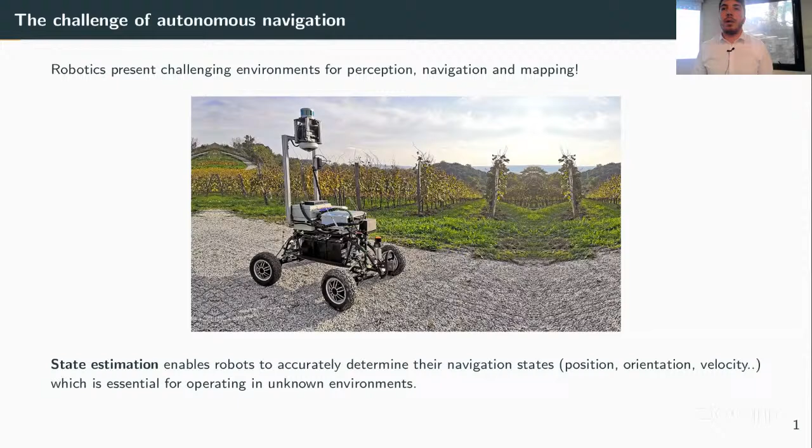So why visual inertial navigation? It basically comprises two types of sensors. The first sensor is a camera. It's a lightweight, cheap, and easily accessible sensor, and it provides us with rich visual information on the environment.

And then we have an IMU, which is an inertial measurement unit, which provides us with measurements on the motion of the robot itself, and that's angular velocity and acceleration of the vehicle. So these two sensors are complementary, and if we combine the measurements, that will lead to low cost and highly accurate navigation systems.

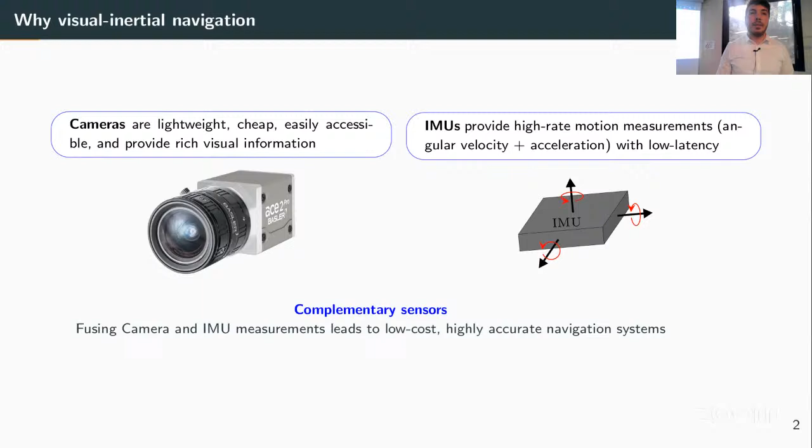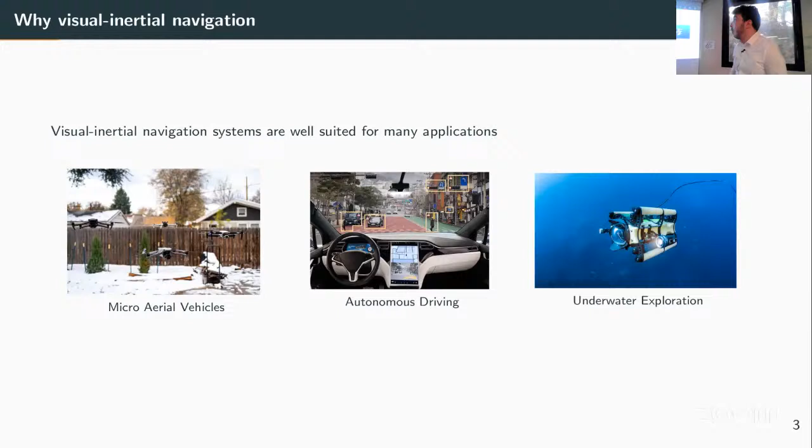So visual inertial navigation is well suited to many applications, like micro aerial vehicles, autonomous driving, underwater exploration and different underwater applications. Also, it's present in wearables and health tracking devices, and in augmented reality and virtual reality experiences more recently.

So why geometric observers? What we mean by an observer or a filter is an algorithm that is designed to estimate the states of a system from incomplete or noisy measurements. In general, we have a dynamical system, and we want to design an observer, which is this algorithm that will estimate the state of the system. In order to do that, we have to design the estimate such that the error between the estimate and the state goes to zero or converges to something that we want.

Luckily, for problems in robotics and navigation in general, the states actually live in a specific type of manifolds, which we call Lie groups. What we mean by a Lie group is that it's a manifold that also has additional structure. For example, we can multiply elements in this group in order to generate new elements, and we can also invert elements. If we multiply an element by its inverse, we get the identity element, which is sort of the central element in the group.

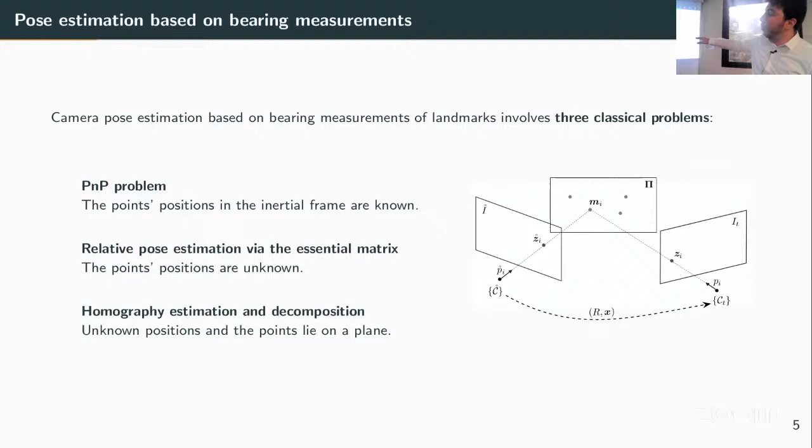Now, when the landmarks happen to lie on a planar surface, then we talk about homography. The way this problem is solved is we estimate this homography matrix, and then we decompose it to extract the relative pose between the two frames. A particular focus of this thesis will mainly be on the last part, which is dealing with homographies for this type of problem. Okay.

So there's a set of contributions that I want to discuss in this work. The first two contributions are essentially related to pose estimation. We want to estimate the pose of a robot, and we want to do it using velocity measurements. Then we will extend this to inertial measurements. And we want to use homographies as our visual measurement to do this.

And for the rest of the contributions, the perspective will change. We will not be actually doing pose estimation, but we will be estimating this homography matrix itself. So we will basically design observers to estimate this matrix, and I will show you later why it's important to also work with homographies themselves. And in the last contribution, I will also talk about something we call polar symmetry, which can also be applied to estimate the pose of a robot for specific types of problems.

Okay, so now I'll start with what we call Riccati observers. As I said, we have some moving frame here, which is C(t). This frame is attached to the camera, and we have some reference frame C0, and we have a relative position and orientation denoted by R and X as the relative pose between the two frames. And we also have a distance and a normal vector to this plane expressed in both frames.

And so if we have coordinates of the points P_i0 and P_i, which are expressed either in the moving frame or in the reference frame, these coordinates can be projected from one frame to the other using the homography matrix. And this matrix is this H, which is a 3x3 matrix that encodes the relative pose between them and the structure of the planar scene, so its direction and distance.

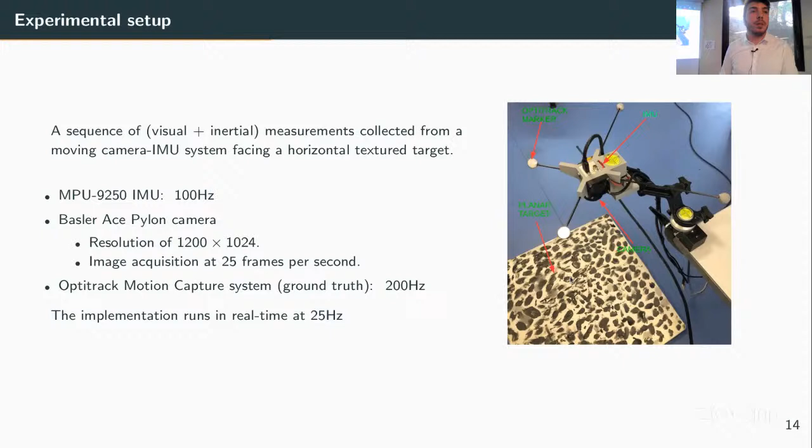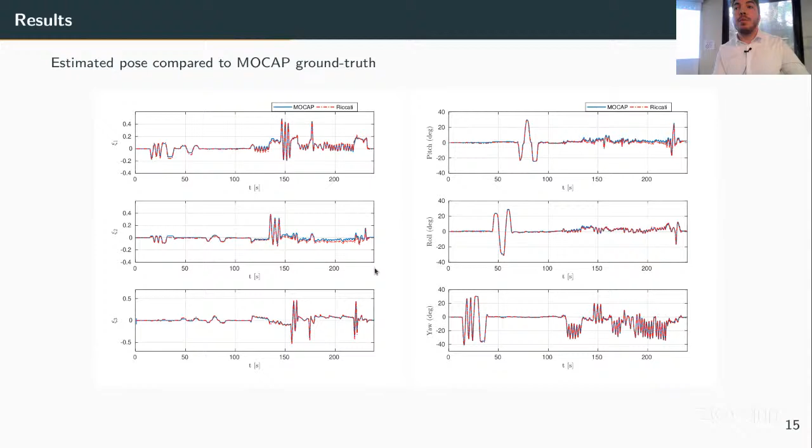So we do this, and we can see here, in blue, we have the motion capture ground truth, and in red, we have our pose estimate. So these are components for the position vector, and these are the Euler angles for the orientation. So we can see that we get some small deviations over here. And this is because the moment we start actually moving in translational motion, the assumption on the constant velocity is no longer valid. So it still converges quite consistently, but we can see that there is some deviation between them.

So a solution to this is instead of using velocity measurements, we can actually use inertial measurements. So we use the accelerometer that we have in the IMU. But this is not very easy to do. So we have our system as previously. Now we have to include the velocity as a state.

And we can also define the error using a group. In this case, it's not the special Euclidean group, it's what we call the extended special Euclidean group. So now we can also add the velocity into the group, and we can define our errors. And in order to design the innovations, we apply exactly the same principle as before. We linearize the system, then apply the Riccati framework.

So we also now have to find uniform observability conditions. So we're also going to require the consistent set condition for the states to converge. And we use uniformly consistent, which is a stronger property that I will not really detail. And we also need a persistently exciting condition that needs to be satisfied on the variation of the velocity. So this sort of says that the velocity cannot be constant. So there has to be some acceleration in order for this to be satisfied. And if this is satisfied, then we can actually estimate the depth, and we can also estimate the gravity. And so we have the local stability of the filter.

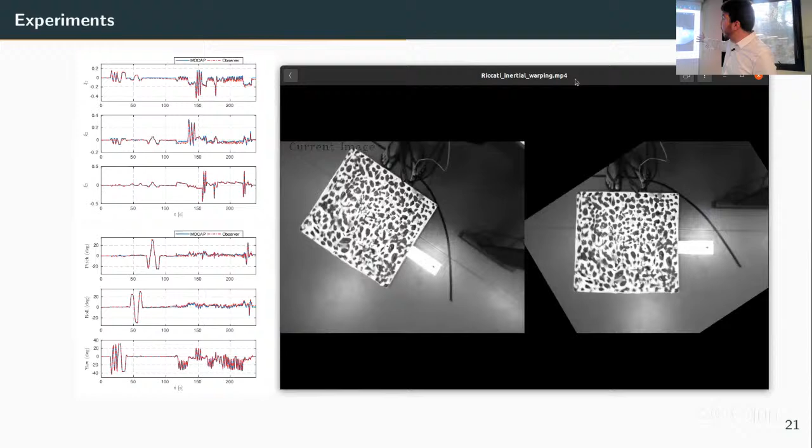So just to show you, these are the results that we got for this one. So just to show you a video. So what we do in this case is we actually do what we call warping. So now I have all the states in order to reconstruct my homography estimate. And I can now evaluate my estimates using this homography. So the homography can be used to warp back all the coordinates into the reference image. So it's as if we have a constant image here, and it's the environment that is sort of moving because we're using this homography matrix.

And at first we have this motion over here, so we have this motion on the yaw. And then we switch to other types of motion. And as these states are actually converging to the ground truth, I can reconstruct a homography matrix and then use that matrix to do what we call warping. So the idea is simply projecting back images from one frame to the reference frame, and it feels like the reference image is not changing at all. It's just that the environment is sort of moving.

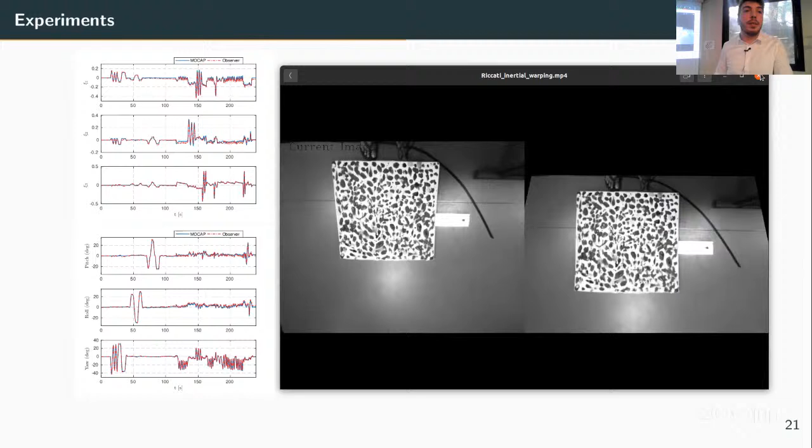So we'll not show the entire sequence, but this is one of the many applications of homographies. This is what we call image stabilization, where we want to stabilize an image, and we can actually use these in control problems and similar things. Okay.

So for now, these are the contributions that I discussed for pose estimation by designing Riccati observers. I will now switch to a different perspective in this thesis, and I will not be talking about estimating the pose itself, but about estimating the homography matrix. So the first contribution in this sense is what we call a dense observer. What I mean by an observer that estimates the homography using dense measurements is that instead of using features in the image, we can actually use the entire image as a measurement. So how do we actually design observers for the homography?

So one idea is that the homography itself is defined up to a scale. So I can always inject some scale gamma over there, and this will generate always the same homography mapping. So I can choose this gamma in a way that will constrain the determinant of H to be equal to 1. And by doing so, I can ensure that this H matrix is in the special linear group, SL3. So you see we're working with a lot of Lie groups. This is one of the popular groups that we can work with.

Now that we are working with a Lie group, we can do a classical observer design on a Lie group. So this group element H has kinematics on the group. So it has these kinematics, H dot is equal to HU. And this U here is what we call a group velocity matrix. And it lives in the Lie algebra of the group, SL3. So this is basically a traceless matrix. So if this matrix is traceless, then this H will always remain in the group.

So what if we don't want to work with features? What if we want to work with the entire pixel information in the image? So one idea is instead of defining the action on the features themselves, you can actually define it on the intensities of the image. So the action of SL3 that I just showed you over here, this one, can actually be used to induce an action on their intensities.

So instead of just mapping the feature points themselves from one image to another, I'm actually now going to map the intensity of the pixel, so the value of the pixel itself, into another image. And we define this new group action here, which is defined as a composition of the image function itself with the other action on the feature coordinates. Now that we have an appropriate action, we can use it to do the design that I just showed you.

So the way it works is I can define an error image. So I have my image over here, which is my image I, and this image is related to my reference image using H. So I can have an H hat inverse, which will take me to an error image, which I want to converge to the reference image. So if this H hat converges to H, these images will be identical. And now what I have to do, I have to use the difference between these two images in order to design my observer. So I can define a cost function.

So this cost is given by this. So it's simply the norm of the difference between the two image maps. And we have this cost. The problem is, are we sure that this cost is non-degenerate? Meaning that when this E here is equal to the identity, is this really a global minimum for this cost?

So we actually derive a condition for that. So if this condition is satisfied, which means that the Hessian of this cost is non-degenerate, then we know that the identity is a global minimum. So we have a proof of this.

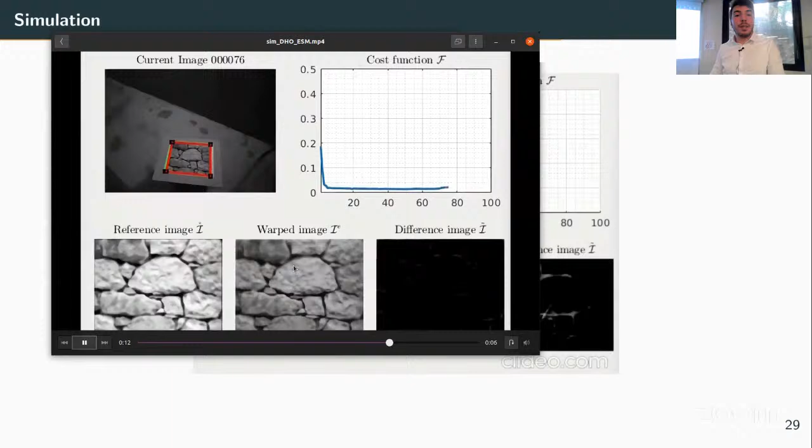And we can see here in red that as it starts evolving, the cost is actually decreasing, and we can see that the warping is actually good, which means that the estimate is converging towards the true homography. Of course, this is not perfect because the pixel coordinates are not exactly perfect. So we can see there's some vibration in the warped image that is slightly moving, but it's still converging towards my image. Okay.

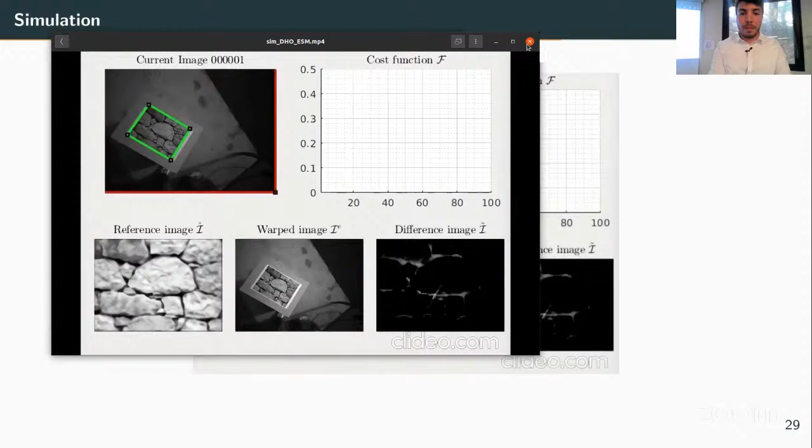So far, this was the contribution for the homography estimation problem. Before, they used feature coordinates directly to estimate the homography; the contribution was we can actually use pixel intensities. However, another issue is we still have to make these motion assumptions to estimate the homographies. So how can we avoid doing that? I will present to you something we call the augmented homography estimation. But before doing that, I have to go into a little bit of theory into what we call equivariant filters to explain what it is.

So what if the state of our system is not on a Lie group, but is on what we call a homogeneous space? A homogeneous space is basically a space on which we can find a symmetry. A symmetry is a group and a group action such that this group action acts transitively on the space. To give you an example, the sphere S2, which is the space of all direction vectors, is a homogeneous space of SO3, meaning that if I have some direction vector, I can rotate it anywhere using a rotation, and I can go to any other direction vector on the sphere.

And so we talk on this side about what we call equivariance. We say that the system is equivariant if we can also find an action on the input space, not really on the state space, which is this psi action, such that this condition here is satisfied. In general, what we mean by equivariance is that if I have some point in the manifold and I transform it into another point, the dynamics will also be translated, but the input will change. So there's also an equivalent transformation on the input space that matches the action on the state itself.

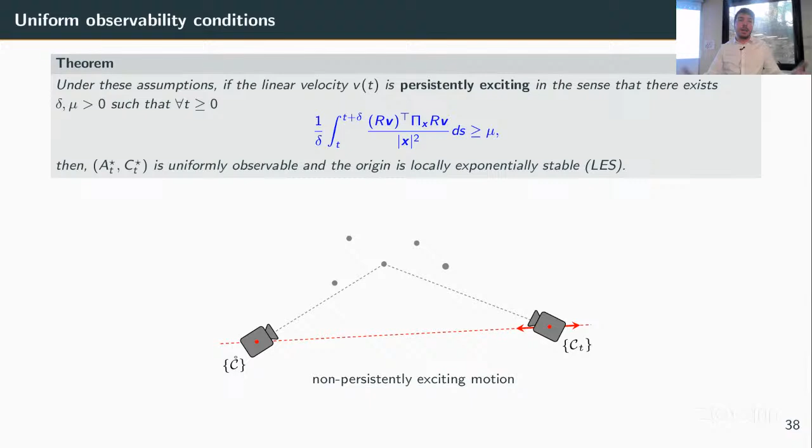However, what about the magnitude? For the magnitude, we actually have a uniform observability condition, and it's the following persistently exciting condition. If this condition on the velocity is satisfied, then the scale component is also uniformly observable, and so the entire state is locally exponentially stable. What this condition says is that the only motion that is not allowed is the motion on the axis relating the two origins of the frames. So if the camera moves like this, the magnitude is not observable. But if it moves in any other direction, it will be observable, and I can estimate it.

Okay, so I finished with the contributions of this work. Just to summarize: we designed Riccati observers to estimate the pose of a camera using homographies as implicit measurements, so we did not have to estimate these homographies but used them implicitly as measurements. We then proposed an observer that estimates homographies using dense measurements. Another contribution was defining the augmented homography problem to design equivariant filters, using velocity measurements or even inertial measurements. And the last contribution is applying the polar symmetry group to estimate the pose by decoupling the position components into direction and scale.

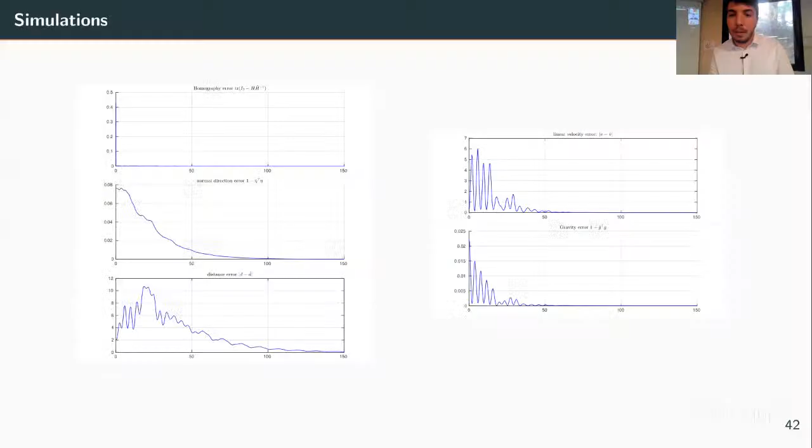So thank you, Tarek. I need to. Is my mic on? Yes. I don't see. What is the Zoom? Can you hear me? Yes, we can hear you. My mic is not on. Okay, so can you hear me? Everybody can hear me? Yes, okay.

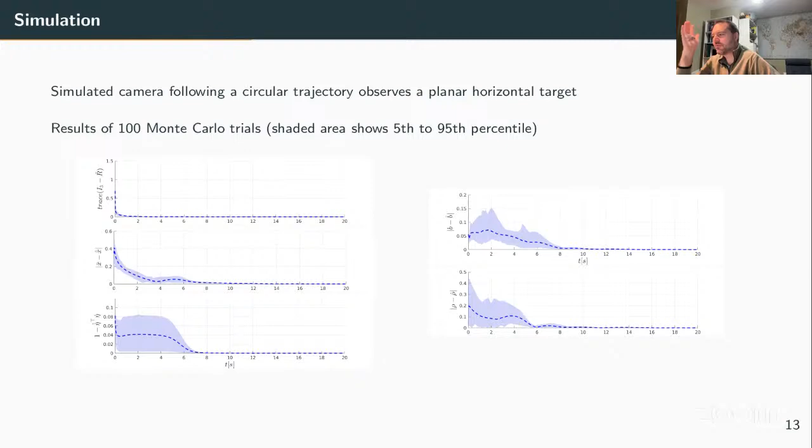Okay, that's good. I want to ask a question about the Riccati observer. I guess this is around slide 14. Slide 10, sure. Okay. Maybe you said this, but I didn't hear a justification for why we are doing a Riccati. Let me back up. When it comes to estimation, there's complementary filters, Kalman filters, lots of methods. If you were to sell this to a startup, why would you want to do a Riccati observer over an EKF or an EQF or even just a complementary filter?

Okay. So with this problem, it's the type of measurement we have. Given our measurements, even if you want to do an EQF or something else, it is quite difficult because there isn't really a symmetry to exploit using this state. My state is R, X bar, and Q, so the Riccati is essentially using the group structure. I'm working with SO3, SE3, but I only want to use the structure of this constraint to derive a measurement equation that works well.

I could do this using an EKF, but I don't think it would work as well. In terms of linearization, and in terms of trying to derive an appropriate measurement equation for this problem, the Riccati is really suited for this type of problem.

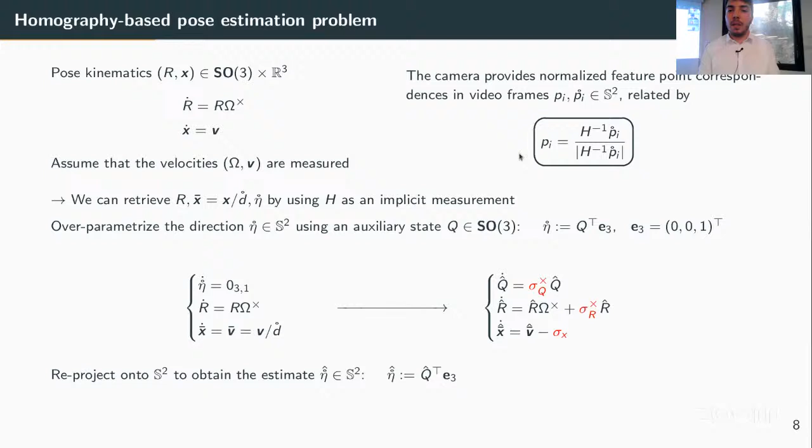So whether it's for homographies or for similar visual problems, what happens in general is that we end up with these sort of nonlinear measurement forms. And so the way it's done here is that I have this H hat over here. This H hat is basically a reconstruction of my homography using the states. So it's R hat plus X hat. This is right. So this is not really a group error.

What I'm doing here is I compute this term, which is H tilde. And then I'm going to use some tricks in order to express it in terms of my errors, so in terms of lambda R, lambda Q, and X bar tilde. And by doing so, I actually end up with a quite nicely represented measurement equation. And I also end up with a minimal representation of my state. And the Riccati, for me, is a suitable choice for this type of problems.

Okay, I want to maybe try to put that in my own words then. So it sounds like the motivation here is that if you have the measurement in a specific form, it really leads to really nice A and C properties that will then have some really nice convergence results. Is that a good summary? Yes. And even if you do this using another design, the C matrix for an EKF will not be. So you'll always end up with a C matrix. So you're actually making the trade-off.

So in our case, the A matrix is actually quite nice because our state is just a pose and a direction. However, my measurement is quite complex because I have nonlinear constraints between sets of points related by homography. So I will end up with a C matrix that is quite complex. However, it is well suited for the analysis of the observer. Even the observability analysis is only done using the C matrix. This is actually a geometric condition. It does not require motion at all. So I only use the C matrix for the observability analysis.

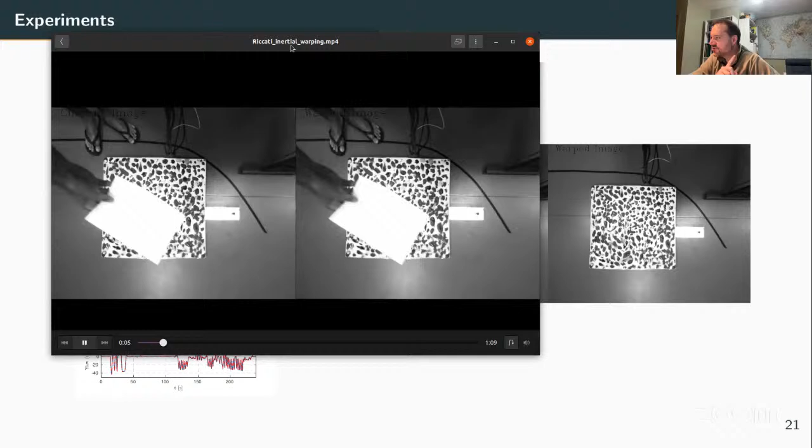Okay, one other thing that I didn't really see in the videos. Can you go to the next slide, slide 21? Yeah, so actually, I want to ask about that. Why did you do that? What's with the piece of paper in the front? Yeah, that's basically...

Okay, but here's what I want to ask though: what about occlusions during motion? At no point did I see the target have less than like 80% of what you originally saw. Where I'm going with this is, how robust is this really? If you move the camera aggressively such that you only have 20% of the original image there, or if you are moving around and you now take that piece of paper over it during moving around, is it really that robust? Because in my experience, the robustness is a problem sometimes.

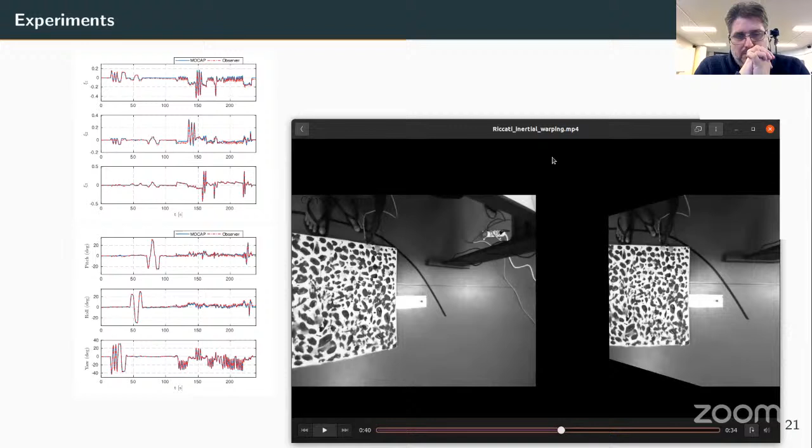So robustness in this case is actually related again. If you talk about the occlusion in this case, do I have enough features for it to work? It will not work as good as if I have the full scene being observed, but it will still converge. And one advantage, in my opinion, for this type of observers is that even if at some point I lose the entire object, so I see nothing, it will still sort of not diverge because I'm doing a propagation step using my IMU.

So I'm using some angular velocity information, some velocity, in this case even acceleration information, and this keeps the camera estimates sort of close to the true ground truth. So then when I have my scene again, I can actually converge back. And even in the sequences, you can end up with quite severe motion, and even with some occlusion, it will not always work, but it will not just abruptly diverge, it will be closely converging, and then it will converge again once I have the image. So there is some sort of temporal correlation between the previous information and the information I get now.

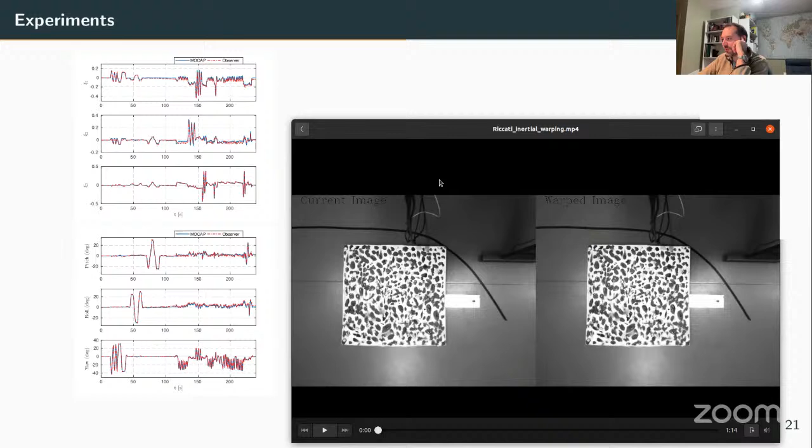Yeah, it would have been nice to see though, right? That sort of robustness is, I feel, practically important. So it would have been nice to see videos on that. But that's okay. So maybe let's move on to the last thing I want to ask and then give everyone else a chance.

Okay, so this cost function itself. The thing with this cost function is it's not uncommon. It's actually what the people who do dense observers in the computer vision literature do. I'm just defining it in continuous time, but it's sort of a sum of squared errors between the pixels and the error image. They also call it the warped image and the reference image. And we simply define it as a cost function. For them, it's more of an optimization problem where they try to find some iterative algorithm that will make the homography estimates converge towards the true homography. So you spoke about this Rx, right?

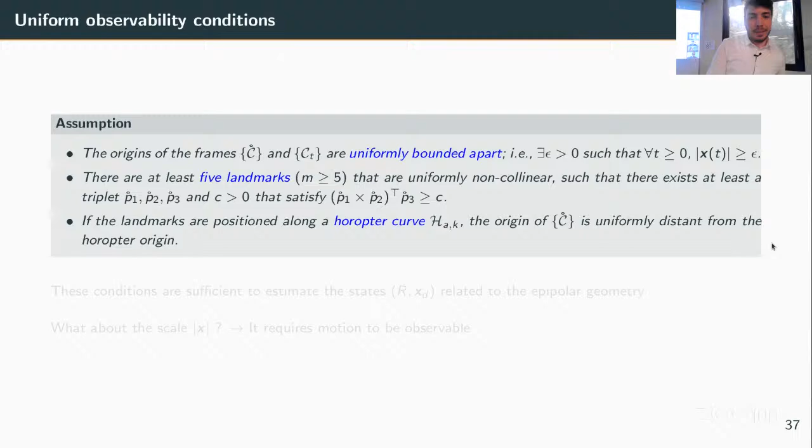So I have one main critique that I put in my report, and that also appears here in the talk, which is the absence of comparison with other methods. So maybe general VIO methods. Why not? But even if you stick to those equations and setting, you could derive many other observers. There are many techniques that exist, and all you do is just show curves, and you see the error goes to zero, and you're happy to maybe go to zero twice faster.

Yeah, I totally agree, and I think this is also a motivation to sell these observers compared to classical EKFs or other types. So I should have done this for the Riccati observer, for example, but what I did for the Riccati, and I didn't really put in the thesis, is I compared it mostly to previous work. In the previous work, done by our group, it was mostly a homography estimation problem, then decomposition. So there were two observers, one estimates homography, the other one decomposes it. And I had these compared with the Riccati observers.

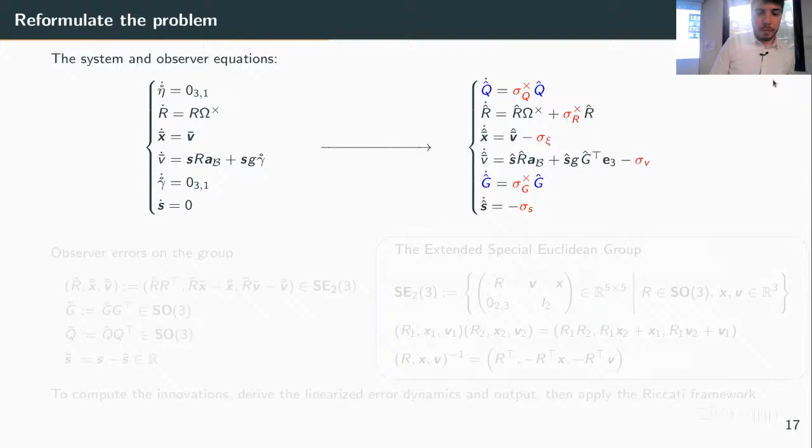What are the theoretical properties? You have this lift and so on, and then you end up with how to compute an observer, right? Yes. But does this observer have properties? Yes. So the error dynamics, for example, are not really autonomous, but they are, for example, in general,

they would be independent on, for example, so everything is represented with respect to this state over here, or at least the xi0 that I didn't write. So actually, when you compute the error dynamics, you end up with something that is not autonomous, but it's quite nice. So when I linearize it, it's not really exact linearization like we have with the IEKF, but I get something that is quite nice.

So the linearization is better than if I do something else, because I'm not really linearizing around the state estimate, but I'm actually doing it around some fixed origin that I choose myself. So for me, this is a huge advantage for the EQF in this sense. It's like when I do it on the group and I linearize around the identity. It's sort of an extension of that property to these types of spaces.

And other properties, I mean, it does have stability, and if I would design an EKF and EQF, I would expect an EQF to converge faster because the linearization for me should be better. This is where I spoke about more naturally representing the state, in the sense that if I represent it using the group and I actually do linearization around the group, this should be better than if I did the observer directly on the manifold.

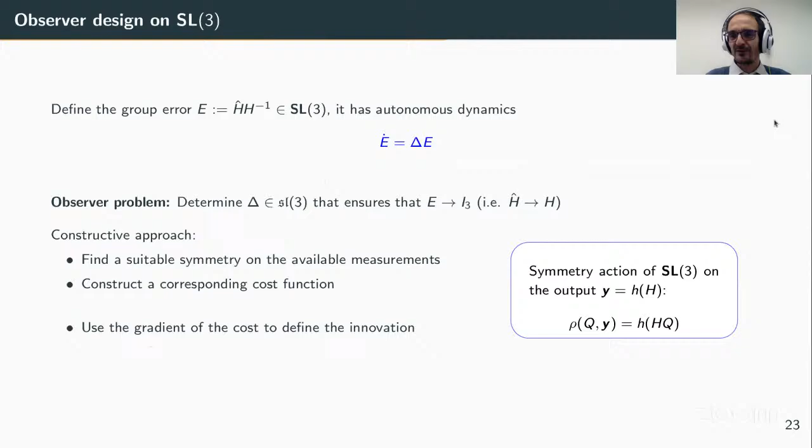That's also essentially the same when you add the velocity estimation, when you have a persistency of excitation condition, and that's also the same kind of conditions that we get in other works on homography, on this problem of estimating homography or pose based on measurements relative to a planar target.

See. Yes. So essentially, I think we waste a lot of time doing all this analysis, which is basically very technical, and every time ends up on the same conditions. So there's something intrinsic in this problem, and I think we waste a lot of time doing all that work. I agree. I did this myself.

Just to answer your question, I do believe that because the condition for the homography itself, for example, is sort of algebraic, there should be a way to say, okay, I have a problem that does not necessarily estimate homography, but it requires it to be observable. Then the criteria should directly correspond to the 4 points criteria, at least for the uniform consistent set and everything.

Also, for the persistence of excitation, I'm not sure if we always end up with the same thing, but I think when working with accelerometers, at least we have this gravity component that appears. We have generally these conditions on the acceleration, and I wouldn't be able to say whether we can find something generalizable, but maybe there is something that would simplify the observability analysis in the sense that instead of dealing with my A and C matrices, I only consider the C matrix because I know that only that part really matters for me.

So I think comparisons, at least for this dense algorithm, are the only way to actually validate it, by comparing it with a lot of the algorithms that exist in the literature. For the homography, as I said, one of the issues is that I compared it to the homography estimation problems. However, for the Riccati, we were not doing homography estimation. We were doing pose estimation. So I looked for work that does similar things, but there wasn't really much.

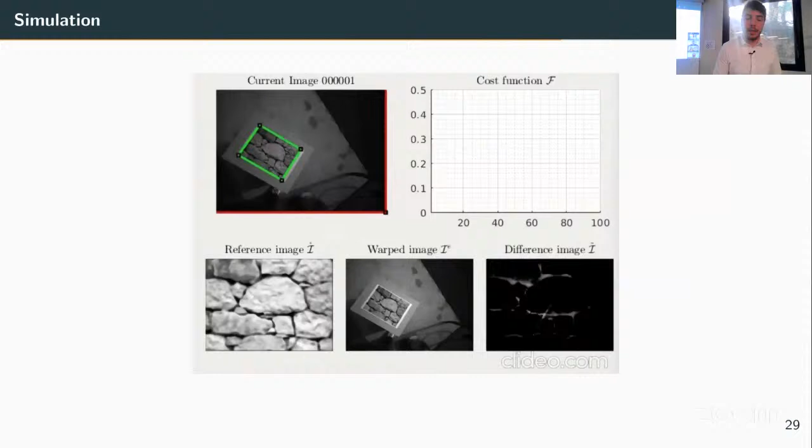One thing that I considered doing, but did not really take much time on, is what Silvère suggested: instead of doing a Riccati, you do it as an EKF and see if the Riccati is actually better. This is something that is on my mind and I want to implement it as well. And finally, for this one,

I also tried to compare this to other algorithms, but the issue is that all the other algorithms do not do this. They do not have velocity measurements. So one possibility is to implement the other one, the extension using acceleration, and compare it with the algorithms that make assumptions on the velocity, and see if using the physical measurements is actually better than not using them.

But basically, on the first contribution, a simple comparison is just to take homography estimates from previous methods, do the extractions, and compare the extractions, so that you have an easy way to at least compare what you obtain with what could be obtained from homography estimates. Yes, I actually did that. I didn't include it, but the first thing I did when I started working on this was to compare to the previous work on homography estimation and decomposition. I will consider putting some comparisons in that sense with the results that I have. Okay.

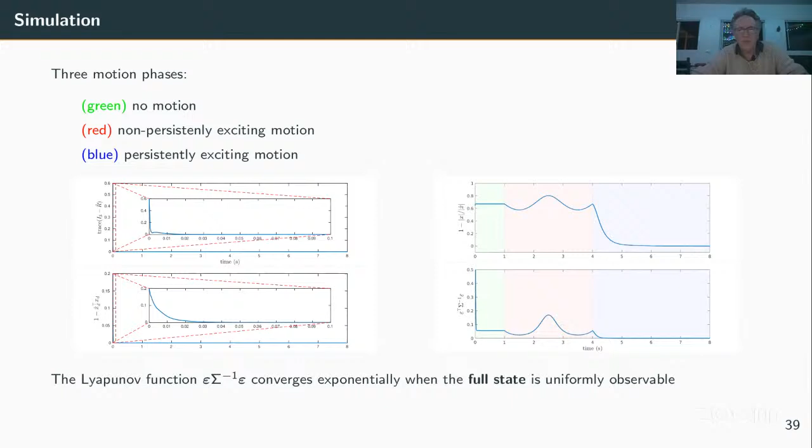So a couple of places in the report and also in your talk, you talked about gradient descent. In particular of the image, you're taking a gradient. Gradients are funny things, right? They need a metric, and there's no inherent metric in most of this symmetry. So exactly what do you mean by a gradient in this situation? What's the underlying metric? You mean for the gradient of the cost?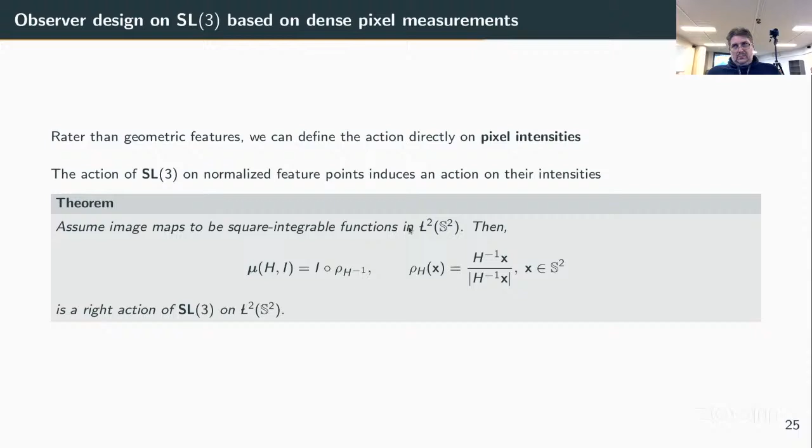Yeah. A gradient of a cost depends on a Riemannian metric, right? Well, the idea here is actually to define image functions as L2 functions. So the gradient is related to the inner product of that definition. All right, and geometrically, does that metric have any symmetry properties with respect to the symmetry that you're applying?

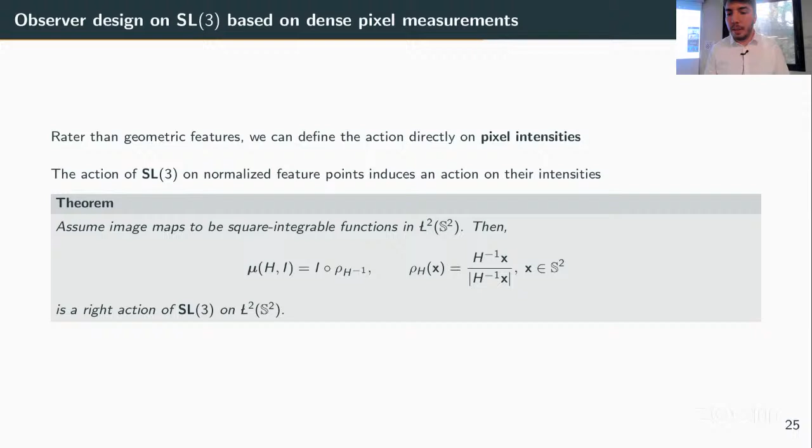It does, because they have this symmetry over here. This symmetry is actually on the image functions, and the metric is defined on the image function itself, at least theoretically. And so the metric is sort of injected here. So this is defined using this.

I don't know. Yeah, it's sort of like because the image is sitting in some sort of Euclidean space, a Hilbert space, right? And you just have a basis for it. So you're taking a differential in that basis and you're calling it a gradient. Yes. And my underlying question would be whether or not that actually has anything to do with the underlying symmetry of the problem,

because symmetries often don't play nicely with metrics, right? Yes. Yeah. I can't think that through at the moment, but it's an interesting question. But well, let's leave that one.

I won't ask many questions because I don't have it in me tonight, but one last question. So in the epipolar work, right? Yeah. You go to this polar symmetry, and you have a lift function. Yes. And so the lift function is quite nonlinear, right?

So the question I'm asking, and it comes back a little bit to Sylvain's question about comparisons as well: what's your perspective on the trade-off between making the kinematics of the system more nonlinear in order to get something nice in terms of your epipolar symmetry, compared to keeping quite nice kinematics on SE(3) or SE2(3) and having a nonlinear measurement function in the epipolar problem?

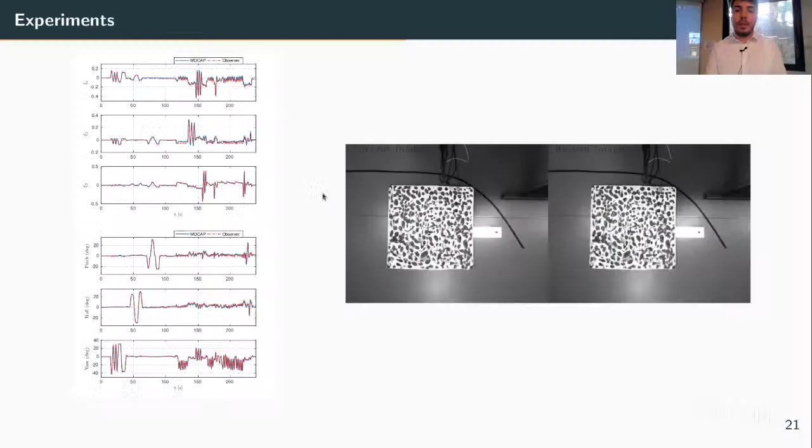And the thing is, at least in the way I see it in terms of the Riccati, we say that it's the uniform observability of the error system, but we're actually evaluating the system at the origin. So in some way, we're analyzing the uniform observability of the true system, because we evaluate it when this error is 0. So this matrix is independent of the estimate, it's actually the true one. That's why in the conditions I end up with, I'll show you here, the condition is not on the estimate, but on the true velocity term.

So if this physical acceleration is different than 0, then I would have this uniform observability. And the idea is you analyze it there, and if it works, then you have some small neighborhood in which, if the error is small enough, this will generalize. But then are the A and the C here independent of your X hat? Yes. I evaluate them when X hat is equal to X. Okay, but they depend on X. Exactly. So the condition will be on X, or equivalently depend on X hat. Exactly. Yes.

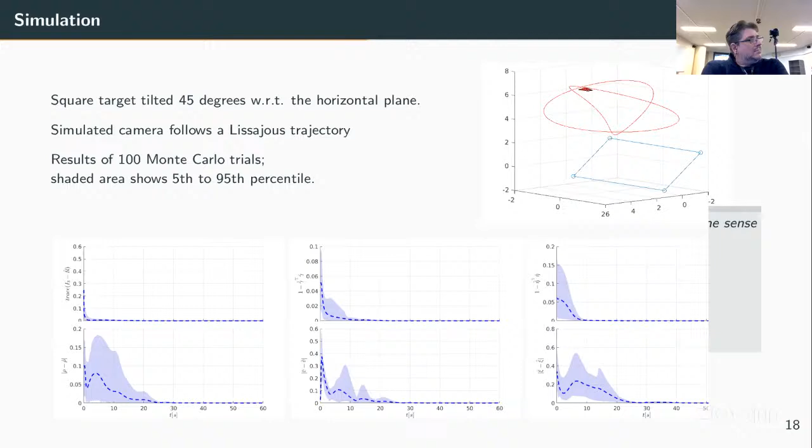Maybe one other thing that stuck out to me is you mentioned the average NEES on one of your slides. Yes. And you said it should be 1. Yes. But it isn't. Why? Well, there also needs to be some tuning for this. So I implemented it the way I did, but I did not necessarily tune it appropriately.

One thing, I was looking for metrics, because I did not do any observability analysis or anything to assess its stability, and I did it purely as a stochastic filter. So I was injecting noise and seeing how it behaves. And Rob was actually the one that told me about the NEES, and I wanted to see if it actually converges to something close to 1, and it did. The idea was to actually compare the NEES with the NEES of an EKF or something else, and see if there is better behavior in that direction.

Right. Thank you. Leave it there. Thanks a lot. Thank you so much. Thank you, Peter. So now, before leaving the word to Tarek for the final. I have a question. Okay. No, before, I have a question as well. I have two questions mainly.

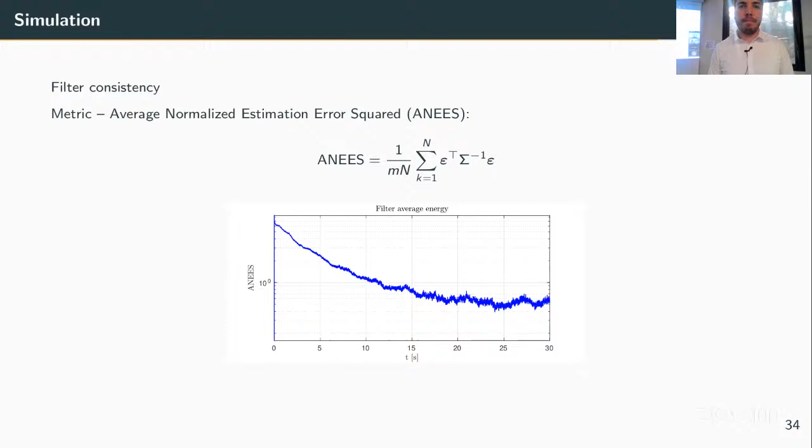So the first one is related to your similarity or comparison with gradient descent. At the end, what you prove is that the gradient will be zero. But this doesn't mean that you actually have the true homography, because gradient zero can also be a local minimum of your cost function. So do you have any hints or any idea that your parameterization will avoid more local minima? Something like a comparison with other methods.

The only way to tell is if you compare it, but at least the way it is, it can easily fall into local minima for sure. Yes, so your observability is more related to the minimum information that you need to converge. It doesn't give you any hints, for example, how much the current and reference image must be superposed to guarantee convergence. Can you get it from the observability study?

No. What we actually get is this condition here, which only says that I need enough gradient information in the image for this cost to be non-degenerate. So at least for the identity, the gradient converges to zero. Yes, exactly. But there isn't really a convergence proof; this is not guaranteed to always converge from any initial condition, because I don't really have a metric.

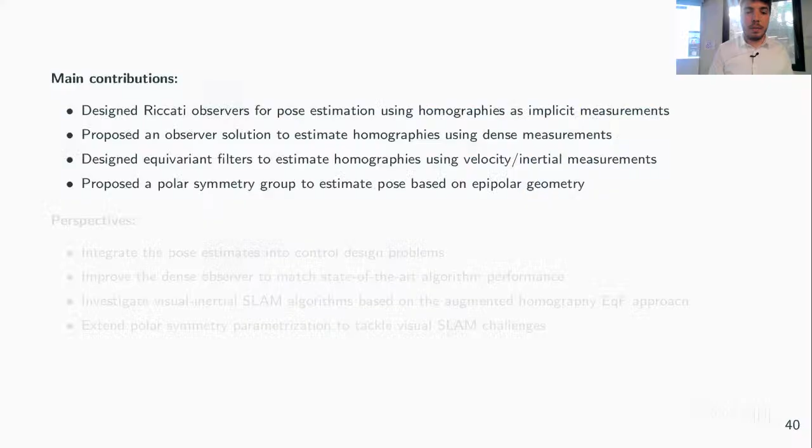Yes. Because if you transpose your idea of overparameterization, for example, if you consider the world piecewise planar and you get n normals to the planes. Exactly. For one plane, it's just one parameter more, because instead of a unit normal vector with two degrees of freedom, you go for a rotation. But when you have thousands of points because you're doing SLAM, reconstructing your environment, you get thousands of variables more.

And again, it's known that the more unknowns you have, the higher dimensional the space, the more likely you get stuck in a local minimum. So do you think this overparameterization would also be suitable for this kind of problem? So it's for this EQF, right? In general. For me, whatever you use after, you add a parameter more, which looks nice from one side, but on the other side.

Well, for me this is interesting because if we assume a piecewise planar environment, these two parameters are the only thing we need to parameterize a plane. So I can get n of these parameterizing different planes, and I will get different homographies as I move. Then, to get the pose, it's more of an averaging thing where I extract the pose from different homographies and refine it to get better estimates over time.

Can you hear me now? Okay. So stay here. Can you hear me? Rob, Pascal? Yes, we can hear you, Tarek. The rest of the room's pretty hard. Yeah, I just need